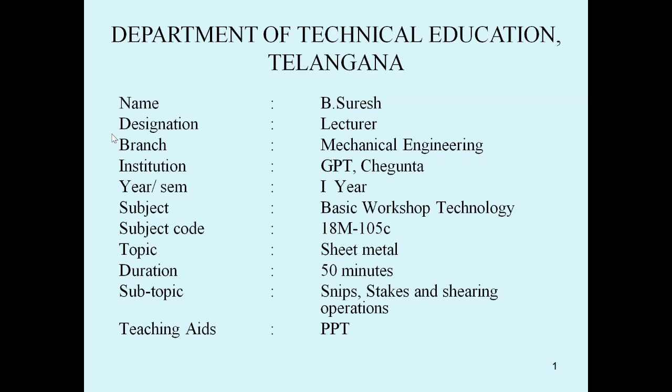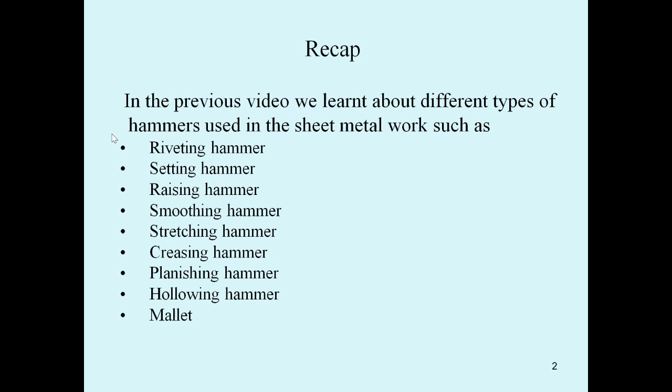Before entering into the subtopics of snips, stakes, and shearing operations, in previous classes we have learned about the different types of hammers used in sheet metal work. Here we can see a list of hammers: riveting hammer, setting hammer, raising hammer, smoothing hammer, stretching hammer, creasing hammer, planishing hammer, hollowing hammer, and mallet. So all these are the different types of hammers used in sheet metal work.

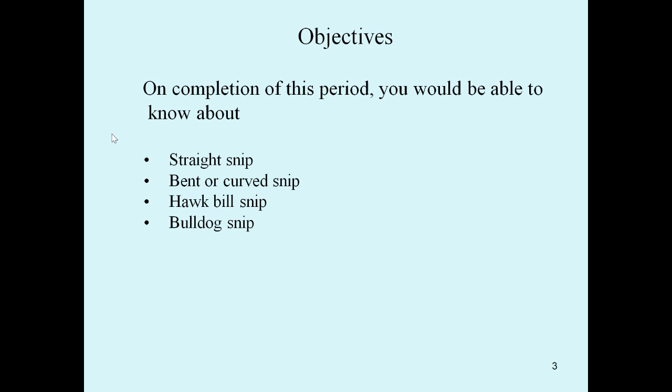Today we are going to discuss snips, stakes, and shearing operations. Here we can see the different types of snips. All these snips we can learn in this class. This is a list of the snips.

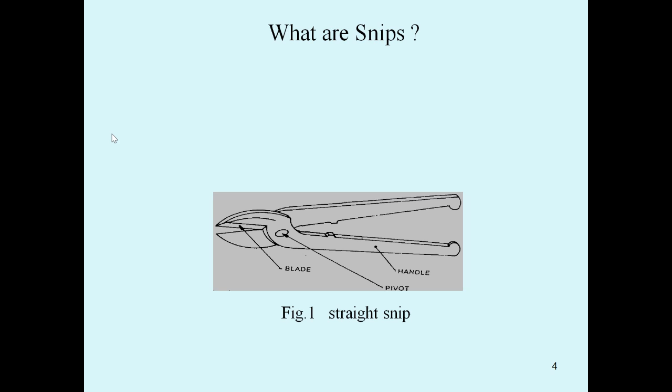So basically, what are snips? This is a diagram you can see here. This is called a snip. Based on the type of blade, we can name the type of snips. Actually a snip is also called a hand shear. Either we can call it snips or hand shear. It is used like a pair of scissors.

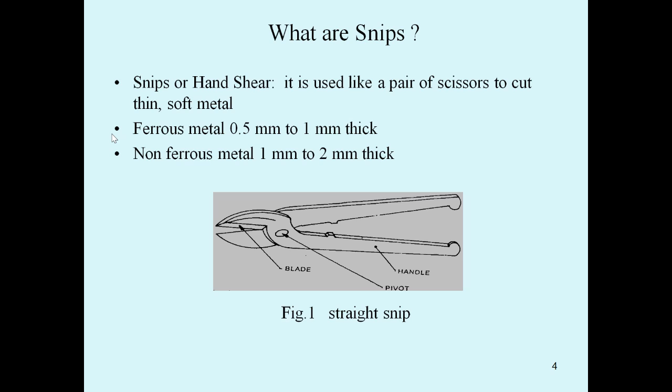This snip is used like a pair of scissors to cut thin sheeted soft metal. Ferrous metals 0.5 mm to 1 mm thick - that is the thickness of the ferrous metals. Next, non-ferrous metals of 1 mm to 2 mm thick. So for ferrous metals it's 0.5 to 1 mm thick, and for non-ferrous metals it's 1 mm to 2 mm thick - that is the thickness of the sheet of ferrous and non-ferrous metals. This is a diagram of a snip.

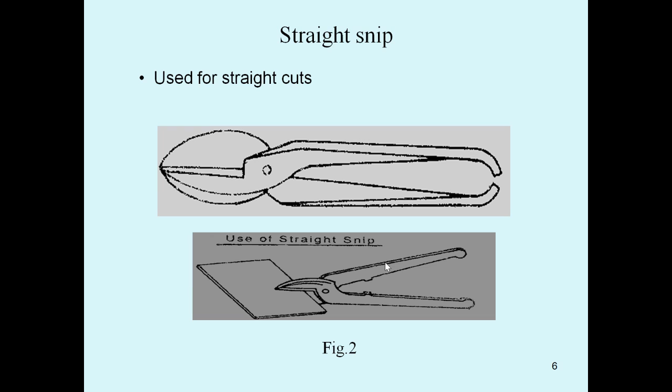Now one by one we'll discuss these types of snips. First one will be the straight snip. We can see the diagram of a snip and the usage of a straight snip. The top one will be the straight snip, and this is the usage of the straight snip - it is used for cutting straight cuts.

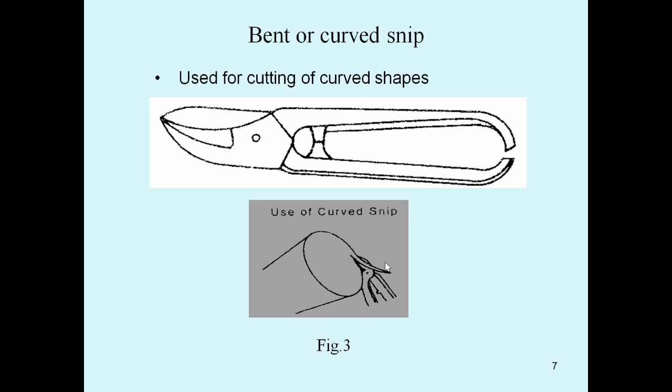Next one will be the bent or curved snips. You can see here. So the first figure will show the blade shape of the curved or bent snip, and the second bottom figure will show the use of curved snips. So bent or curved snip is used for cutting curved shapes of the sheet metal.

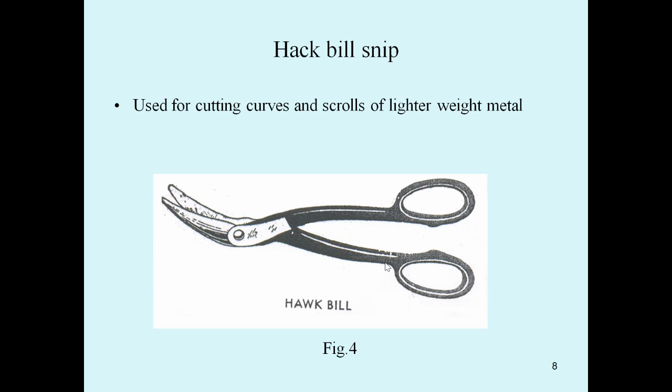Next, hawk bill snip. We can see the hawk bill snip. This type of snip is used for cutting curves and scrolls of lighter weight metals.

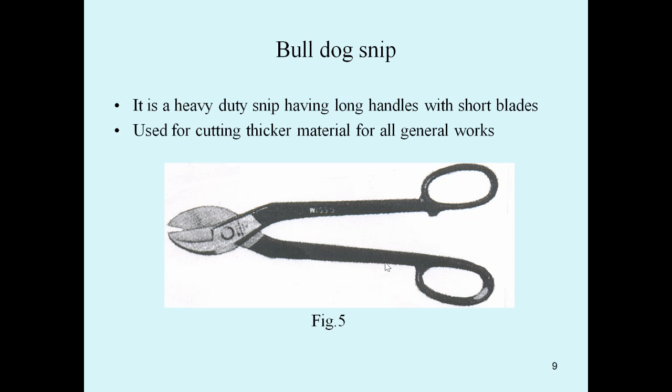Next, bulldog snip. This is a diagram of a bulldog snip. This bulldog snip is a heavy duty snip, having long handles with short blades. It is used for cutting thicker materials for all general works.

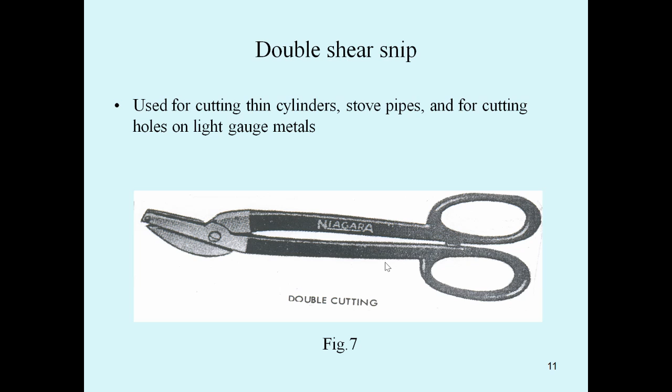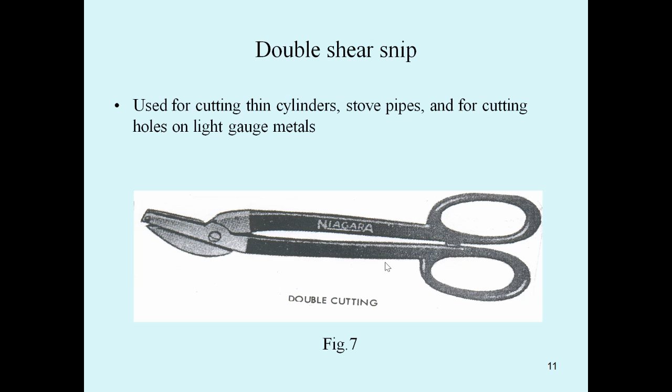Next will be double shear snips. This is a diagram of a double shear snip. This double shear snip is used for cutting thin cylinders of a sheet, stove pipes, and for cutting holes on light gauge metals.

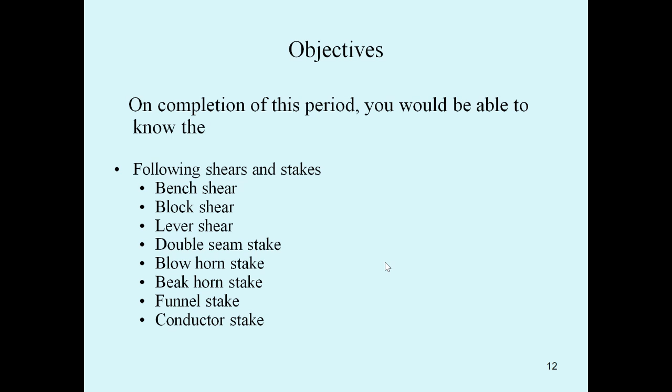So we can see the different types of shears and stakes here: bench shear, block shear, lever shear, double seam stake, blow horn stake, beakhorn stake, funnel stake, conductor stake. So all these are the different types of stakes used in sheet metal work.

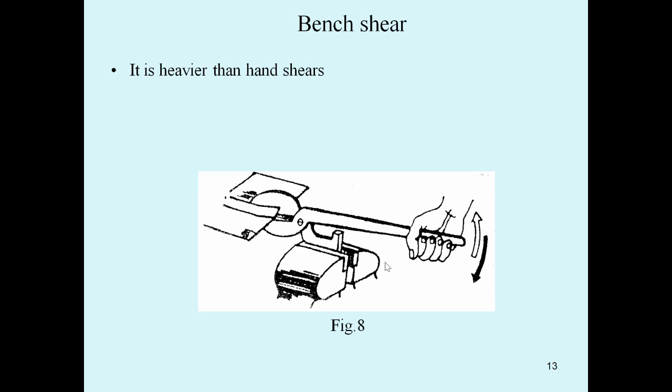The bench shear is heavier than the hand shear. One arm of the shear is fixed in a vise - here we can see the bottom arm, which is the fixed one - and the other arm is moved by hand for cutting.

This is for cutting the sheet. One end of the arm is fixed in a vise and the other end is moved by hand for cutting the sheet. This is used for cutting up to 2 mm thick sheet metals, preferred for non-ferrous metals.

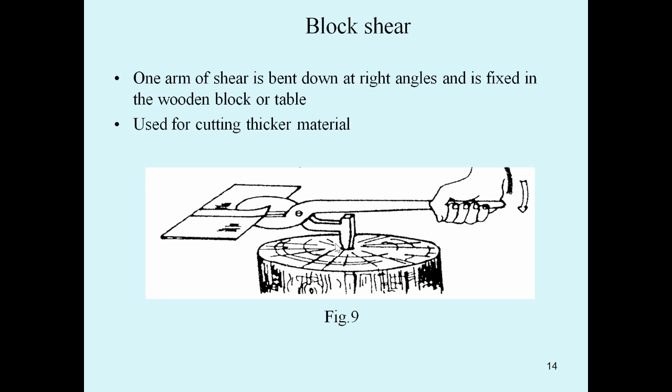Next, block shear. One arm of the shear is bent down at right angles and is fixed in a wooden block or a table, at an angle of 90 degrees. This block shear is used for cutting thicker materials.

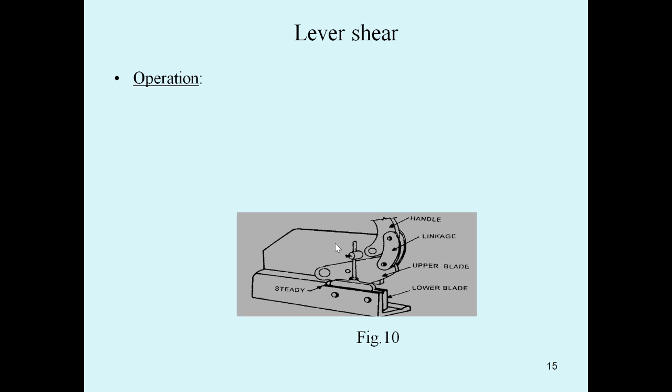Next is the lever shear. We can see the operation of a lever shear. The lever is grasped with the right hand and is moved in its upper portion to lift the blade.

The workpiece is set in the left hand, and the lever is driven downwards to take the cut on the metal sheet, cutting it. This lever shear is used for cutting thicker sections.

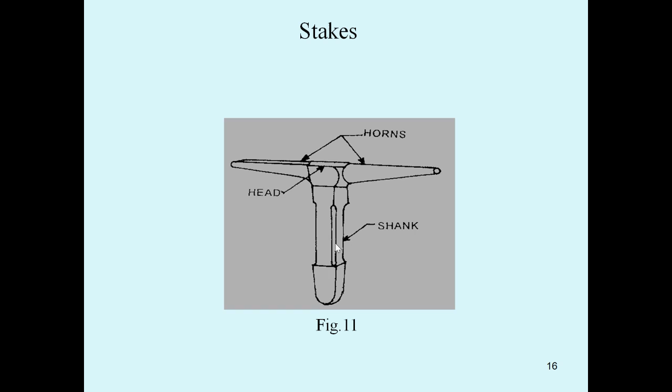Next we can see the stakes. This is a diagram of a stake - it has a shank, horns, and head. A stake is a sort of anvil which supports the sheet to perform many sheet metal operations.

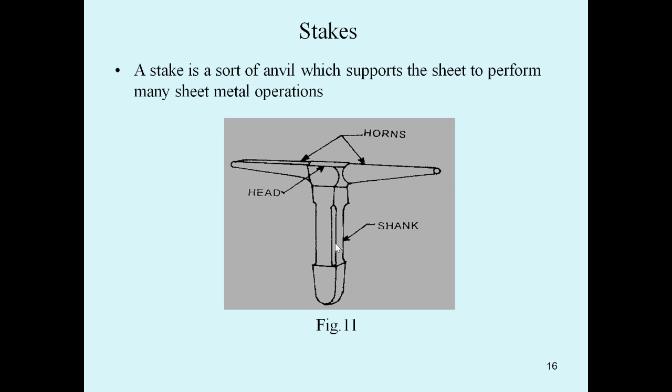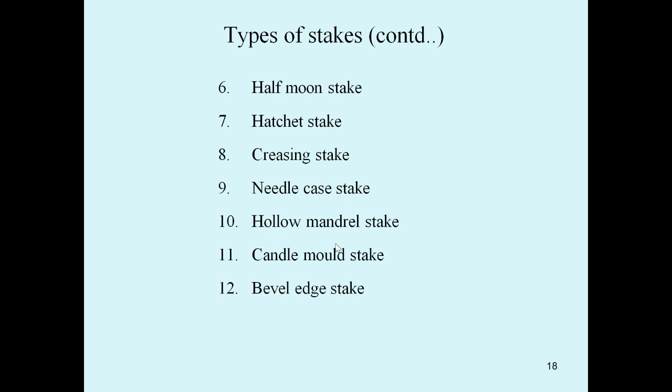Next we can see the types of stakes: double seam stake, blowhorn stake, beakhorn stake, funnel stake, conductor stake, half moon stake, hatchet stake, creasing stake, needle case stake, hollow mandrel stake, candle mould stake, and bevel edge stake. These are the different types of stakes used in sheet metal work, and we will discuss them one by one.

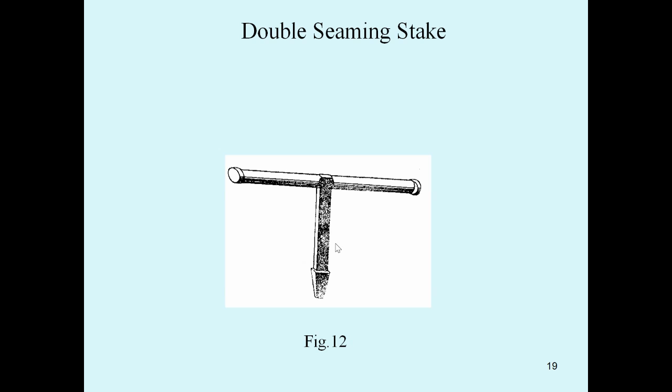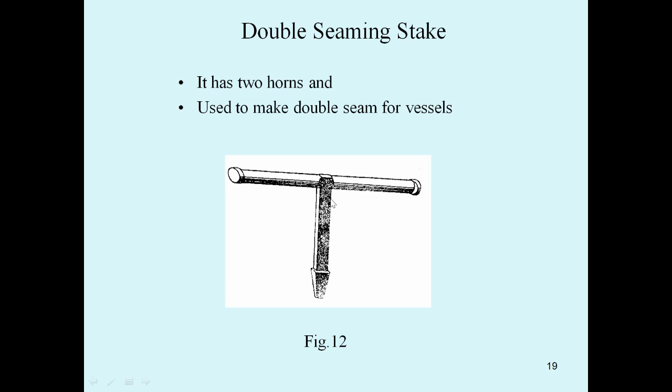The first one is the double seaming stake. We can see the diagram here. It has two horns - this is the first horn, this is the second horn - and it is used to make double seams for vessels made of sheet.

Next is the blowhorn stake. We can see the diagram of a blowhorn stake - it has two horns, one a short tapered horn and the other a long tapered horn. This type of stake is used for forming and seaming tapered articles like funnels.

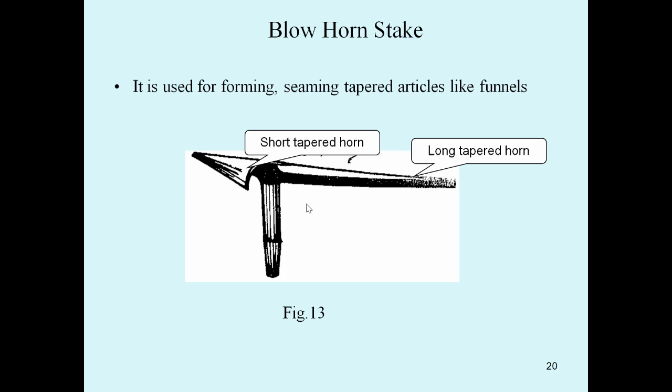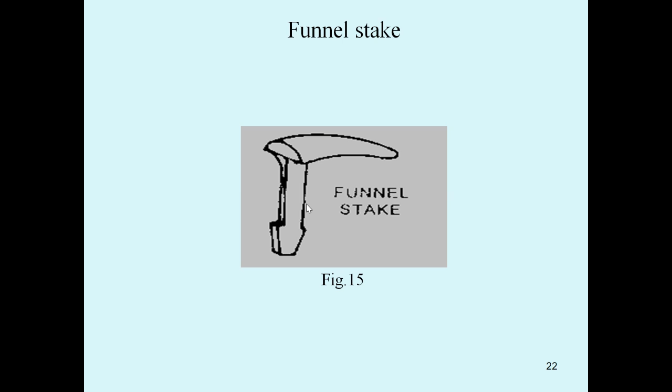Next is the funnel stake. This type of stake is used for forming conical shapes. If you want to form conical shapes of the sheet, by using this funnel stake we can make conical shapes for making wire rings.

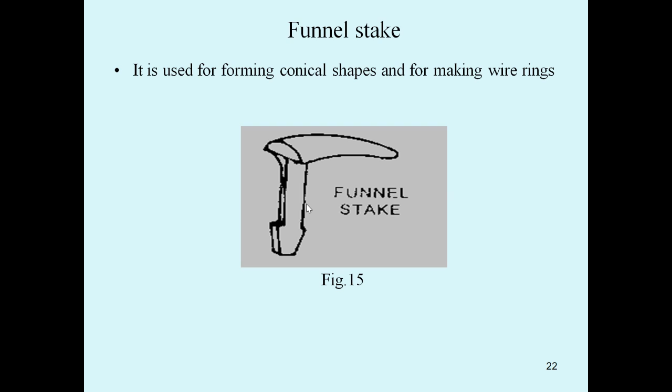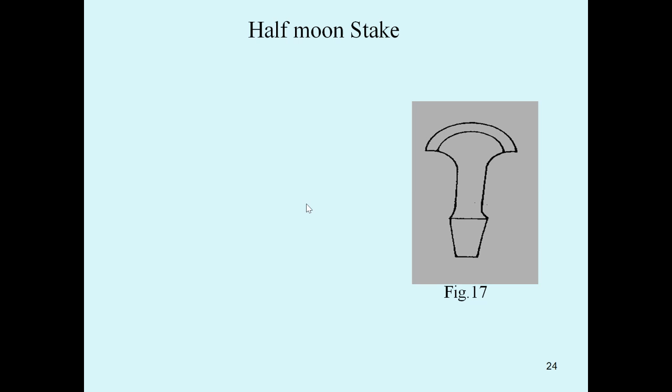Next is the half moon stake. This half moon stake is used for folding edges of cylindrical shaped articles of a sheet metal.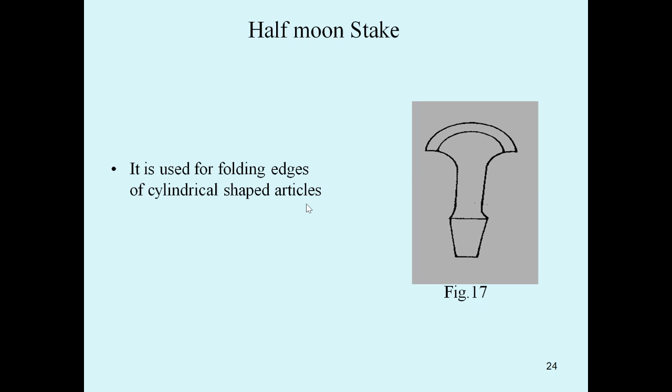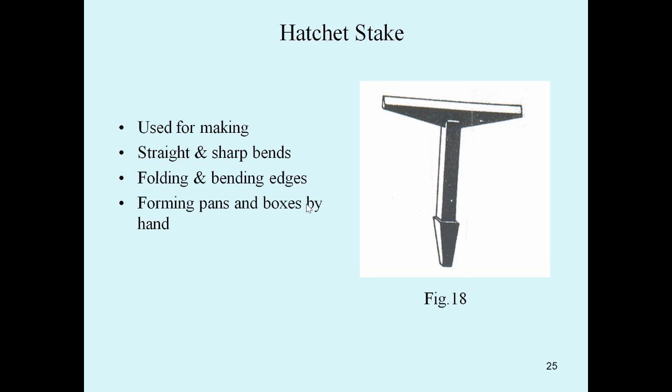Next is the hatchet stake, used for making straight and sharp bends. If you want to make straight and sharp bends of a metal sheet, you can use this stake. It's also used for folding and bending the edges of a sheet, and for forming pans and boxes by hand.

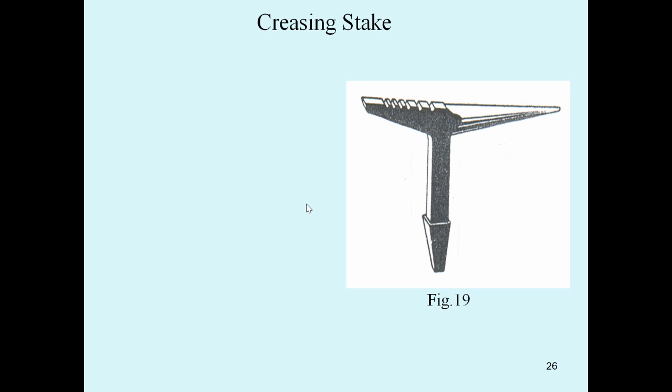Next is the creasing stake. One end is flat, the other end has grooves. The grooved rectangular horn is used for bending wires. The tapered round horn is used for forming conical shapes.

Next is the needle case stake. It is used for forming tubes, wires, wire rings, and bending metals for very fine hand work.

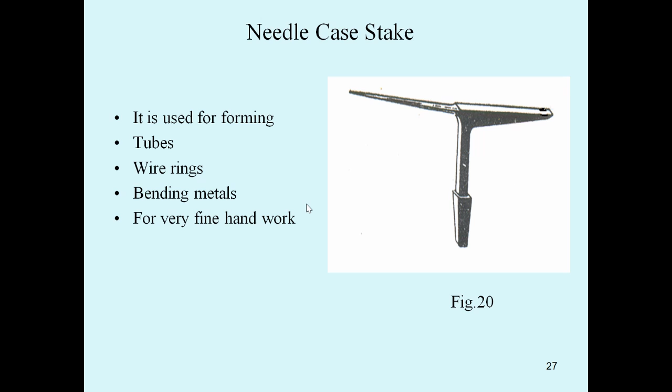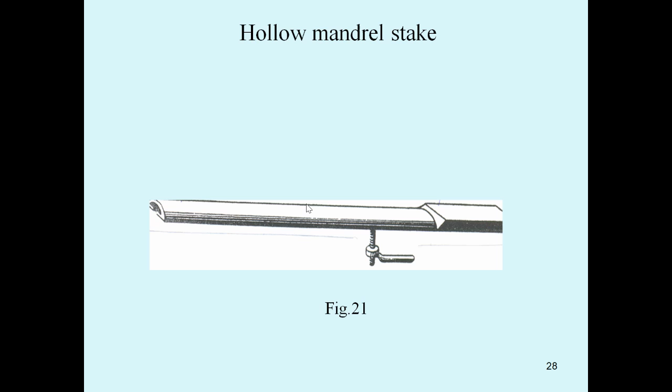Next is the hollow mandrel stake. The round head is used for riveting and seaming pipes of a sheet. The flat rectangular head is used for forming laps, and for double seaming corners of pans, boxes, etc.

Next is the candle mold stake, used for forming, riveting and seaming long and flaring articles.

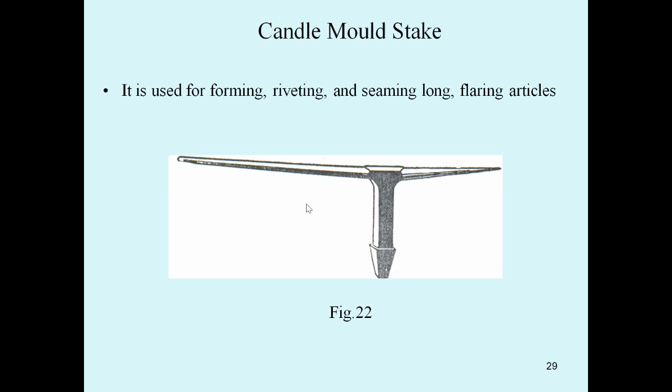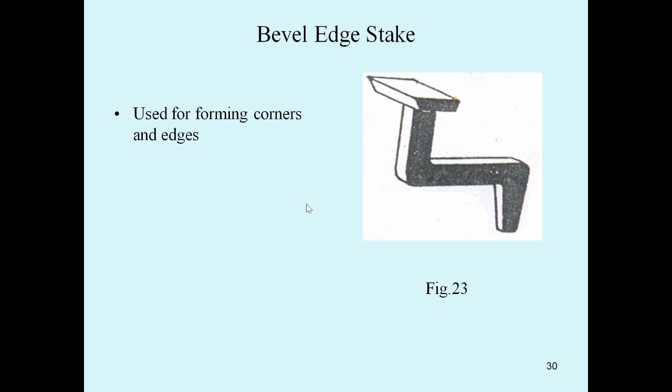Next is the bevel edge stake, used for forming corners and edges of a sheet, which permits the work to clear the bend.

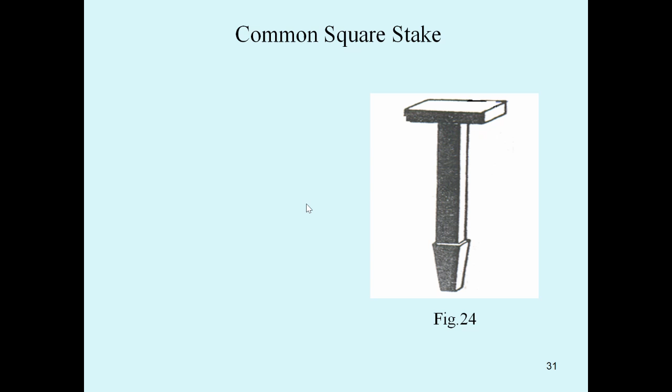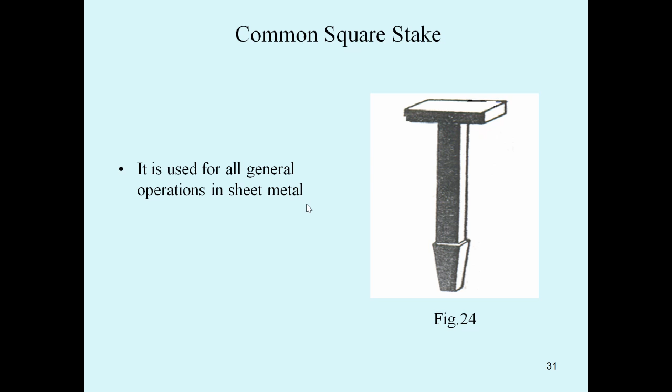Next is the common square stake. It is used for all general operations in sheet metal work.

Next is the round bottom stake, used for squaring up round edges of a sheet, and for setting up the bottom of cylindrical work.

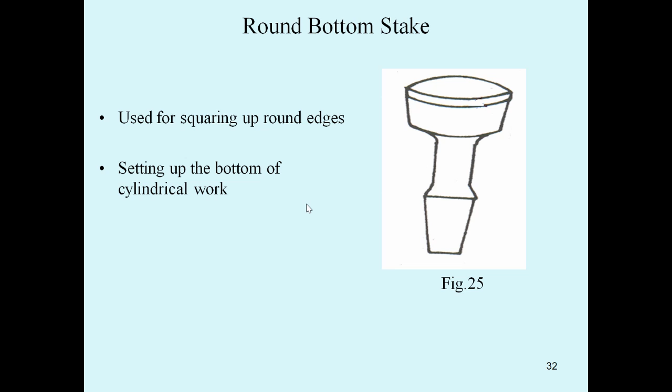Next is the tea kettle stake. It has four differently shaped heads and is useful in many operations in sheet metal work.

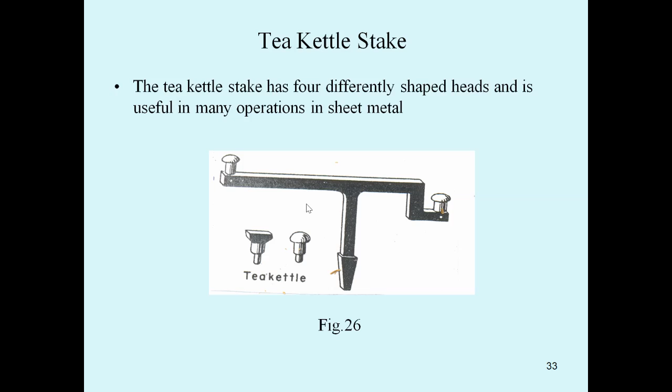This hand groover is used for grooving a seam by hand. The end of the tool is recessed to fit over the lock, for making the grooved seam.

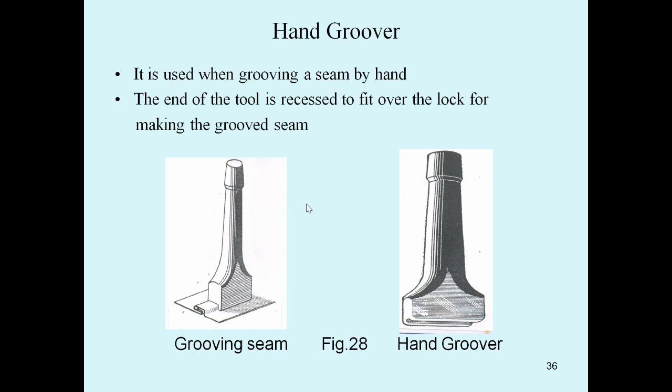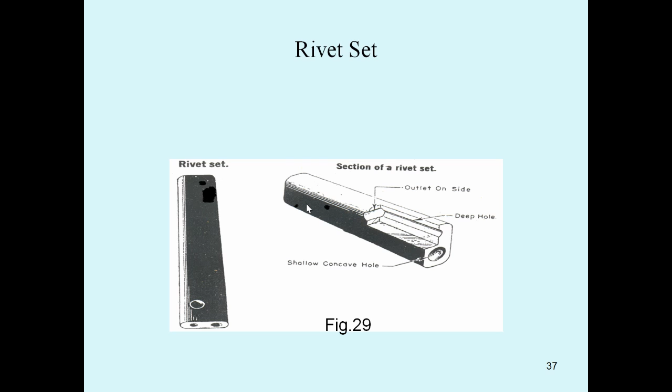Next is a rivet set. This is a diagram of a rivet set, showing its parts: outlet on side, deep hole, and shallow concave hole. These are the three parts in a section of a rivet set.

This rivet set is used for making riveted joints on sheet metal. If you want to join two sheets, you can use this rivet set to make riveted joints. Next is the hand seamer.

This is a diagram of a hand seamer. It is used for bending narrow portions.

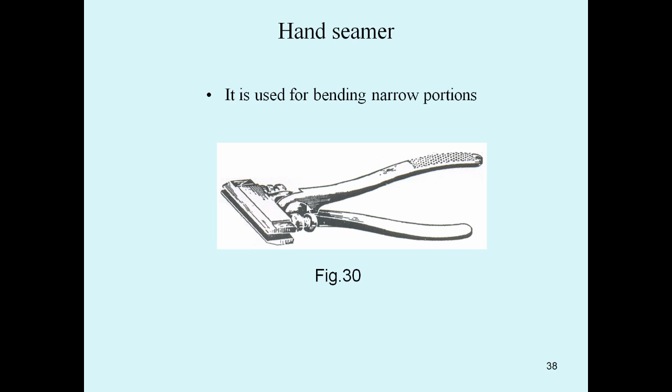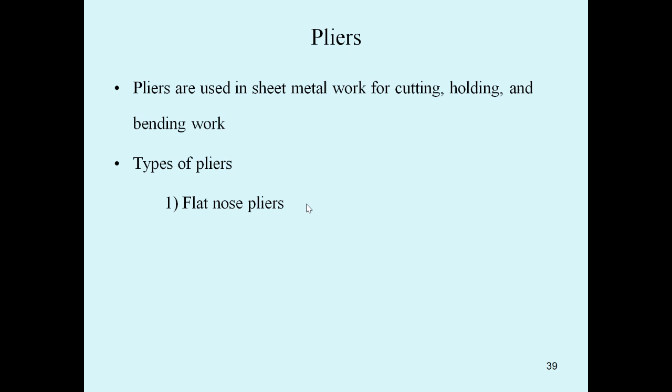First is flat nose pliers. Second, round nose pliers. Third, combination pliers, also called slip joint pliers.

First we see the flat nose plier. This is a diagram of a flat nose plier, having flat jaws with small grooves, used for forming and holding the work metal sheet.

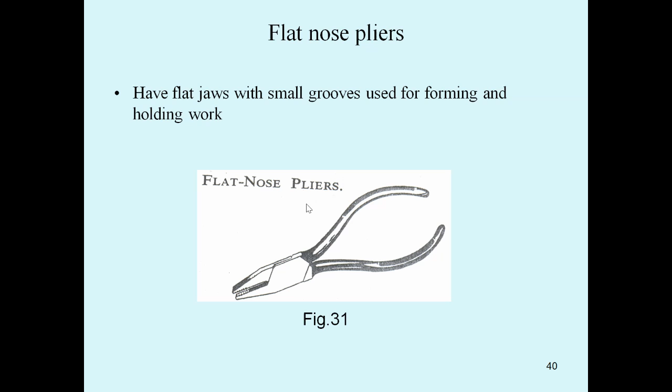Next, round nose pliers. This is the diagram of a round nose plier. It has long jaws rounded on the outside, used for holding and forming various shapes.

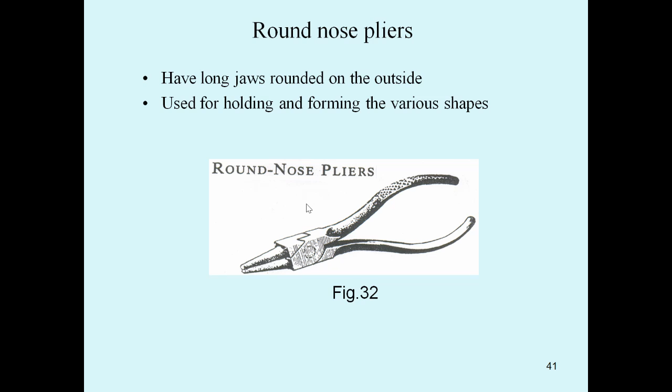Third is the slip joint combination plier. This is a diagram of a slip joint combination plier. It has an adjustable jaw, which is used for general purpose work in sheet metal work.

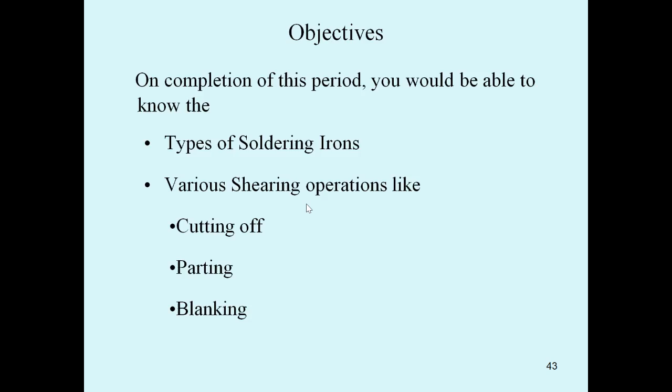Next we can see the types of soldering irons, used in various shearing operations like cutting off, parting, and blanking. Now let's see what a soldering iron actually is.

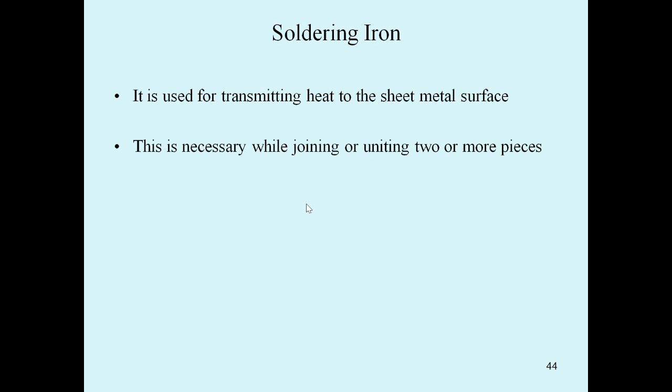It is used for transmitting heat to the sheet metal surface. By using this soldering iron, we can transmit heat to the sheet metal surface. This is necessary while joining or uniting two or more pieces for making seams watertight.

Next, the types of soldering irons: straight soldering iron, hatchet soldering iron, and electrical soldering iron. This is a diagram of a straight soldering iron, which is used for general purpose soldering.

A gas bench furnace may be used to heat the soldering point.

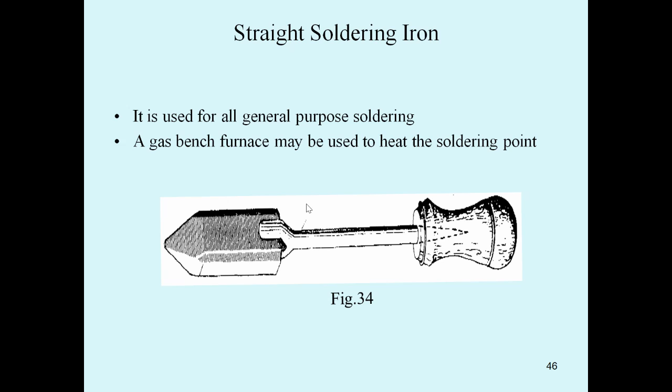Next is the hatchet soldering iron. This type of soldering iron is used for soldering the bottom of objects, such as tanks, containers, vessels, etc.

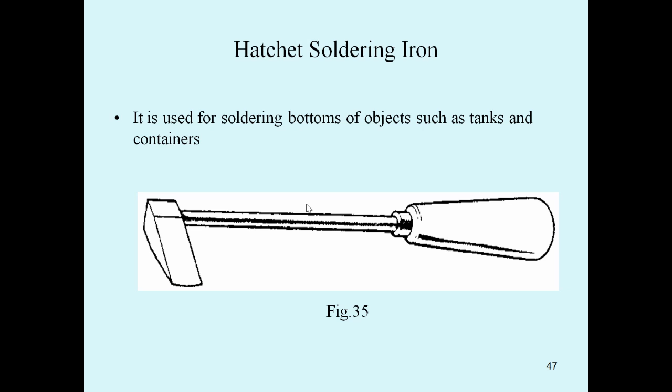The last one is the electrical soldering iron. This electrical soldering iron is used for specific soldering operations.

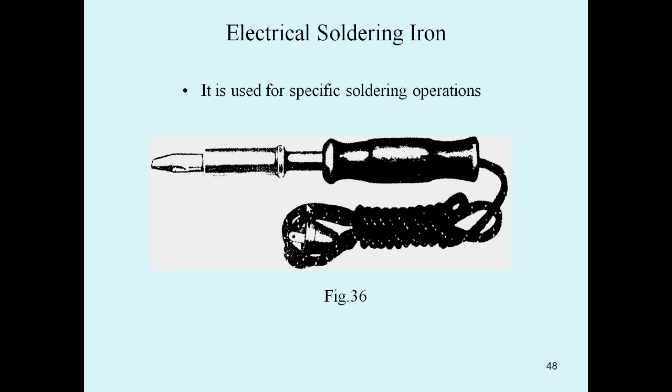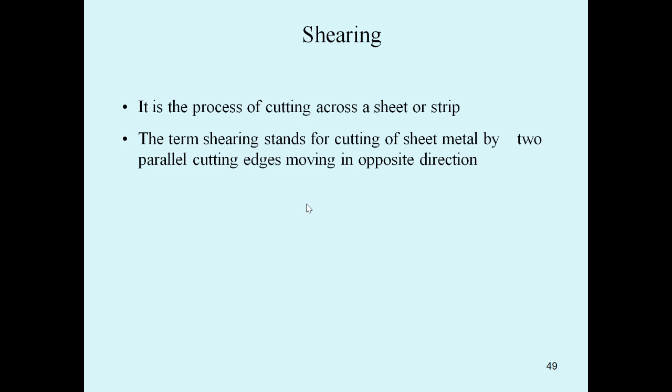Next we can see shearing operations. What is shearing? Shearing is the process of cutting across the sheet or strip. The term shearing stands for cutting of sheet metal by two parallel cutting edges moving in opposite directions. This can be done by shears or snips.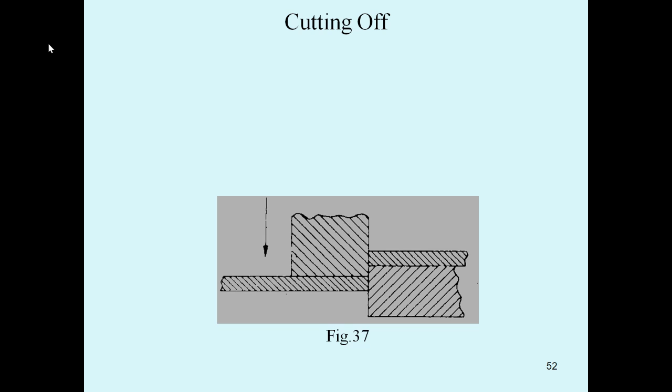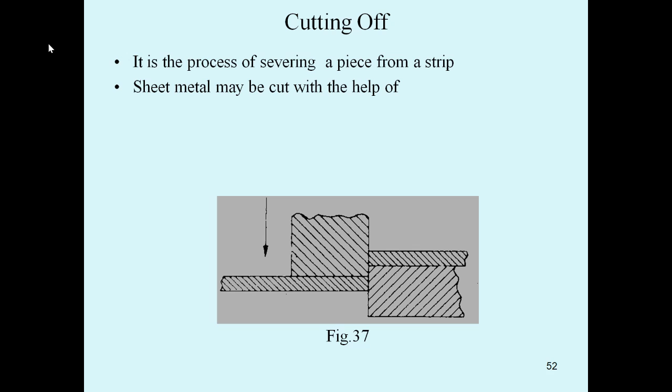So the next topic is cutting off. This is a diagram of cutting off, which comes under shearing operations. Cutting off is the process of severing a piece from a strip. Sheet metal may be cut with the help of chisels, hand shears, or shearing machines.

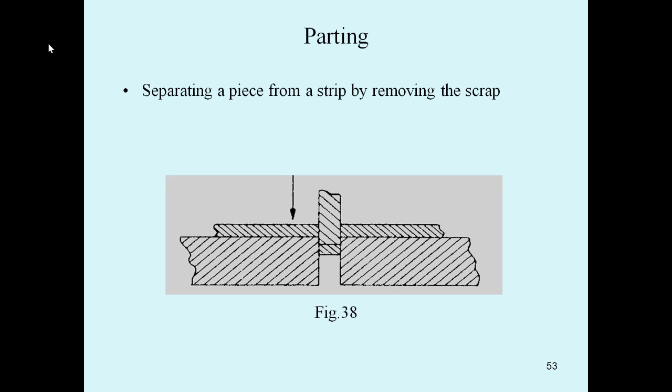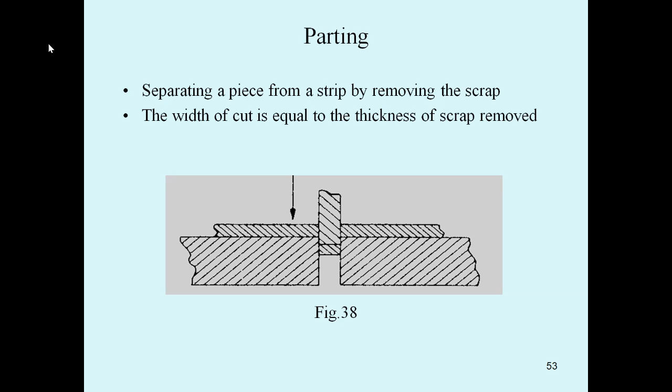Next is parting off. We can see parting off here: separating a piece from a strip by removing the scrap. The metal sheet is placed on top of the die, and with the help of a punch we apply pressure on the sheet so that we can separate a piece from the strip by removing the scrap - that is parting off. The width of cut is equal to the thickness of the scrap removed.

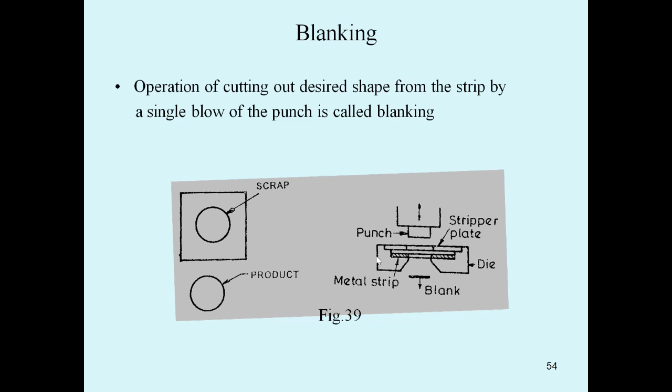Next is blanking. We can see the diagram here - this is the scrap, and this is the product that comes from the sheet. After removing the product from the metal, this is called the scrap and this is the product. This machine separates a product from the strip. We can see the punch, metal strip, blank, die, stripper plate - this is the machine. Blanking operation is cutting out a desired shape from the strip by a single blow of the punch.

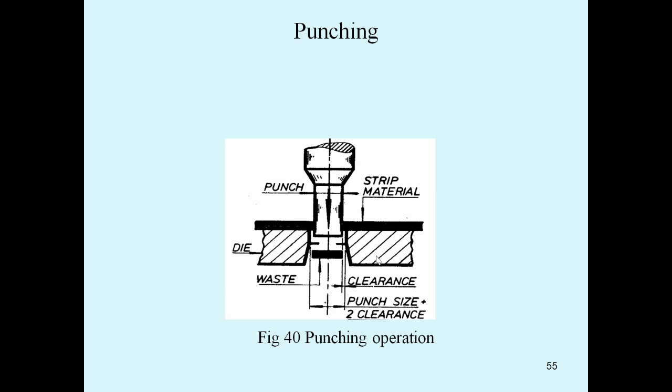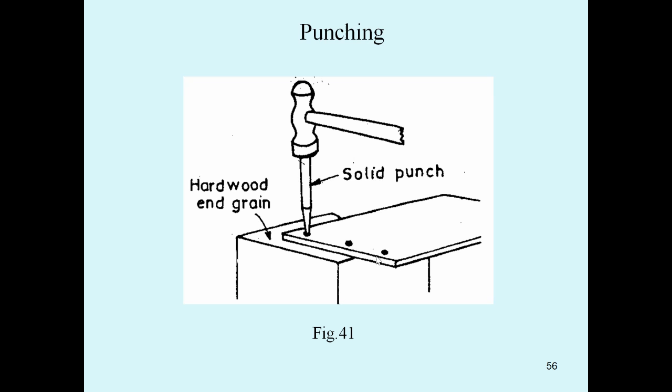Next is punching. This is a diagram of punching, showing waste, die, punch, metal strip, material strip, clearance, and punch size plus 2 clearance - these are the parts of a punching machine. Punching is the process of making a circular hole using a punch and a die, or using a solid punch. Punching is done with the help of hand power - hardwood end grain, solid punch - with the help of a hammer we give a blow on the top surface of the punch tool. We can see the punching machine here.

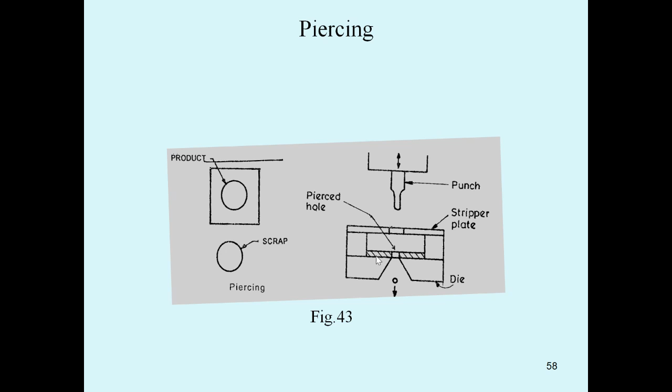Next shearing operation is piercing. We can see the product here. In the previous operation, the circle was the product and the rectangular piece was the scrap, but here it's vice versa - the machine is the same, but the product and scrap are different. It is the process of producing holes of any desired shape, not necessarily circular - this is called piercing.

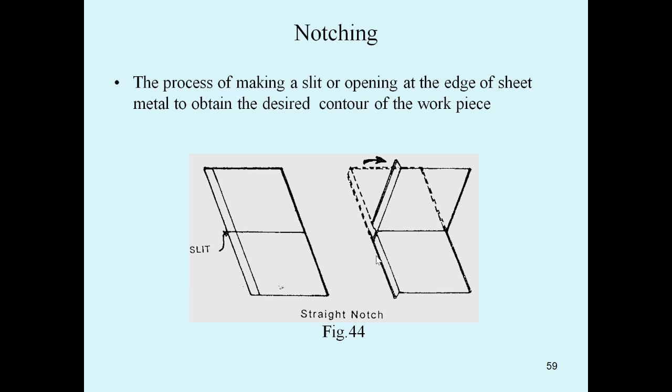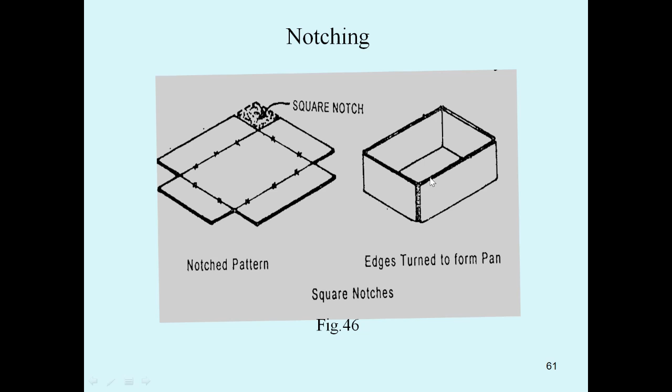Next is notching. We can see the diagram of a straight notch, and next there is a slit. Notching is the process of making a slit or opening at the edge of sheet metal to obtain the desired contour of the workpiece. Simply, notching is the process of cutting out the edges of a sheet so that we can make them into different shapes, to produce a variety of components. We can see here the folding procedure of notching, and preparation of a pan - the notched pattern, and the edges turned to form the pan, using square notches.

Next is bending, one of the types of shearing operation. By using a tool such as a clamp or holding device, we can hold the sheet, and with the help of a hammer or mallet, we give a blow to the sheet. A mallet is a soft hammer, so that we can make simple bendings of the sheet. So bending is the folding operation, using stakes or forcing bars, with mallets or hammers. That concludes this topic - I will stop here.